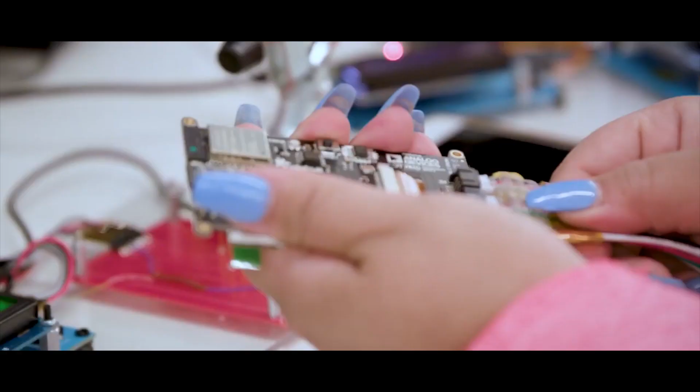It began when I started contributing in open source. I noticed that out of 40 contributors, we were only 2 women. And I thought that something needs to be done about increasing the women contributors. There is a lot of focus now on how do we get more people into the community, not putting up walls. There's a lot of projects and things you can do that even if you're not a coder, you can help contribute.

Open source is a great way to learn a new technology, and open source is a great way to build communities. We have this weekly show that we do called Show and Tell.

We got an email from a parent. He said, my daughter turned to me and said, are there any boy engineers or are they all girls? Just because we have such a wonderful community that's so inclusive and we have such a wide range of people showing off their projects, this girl was living in a world where she could see so many people of different backgrounds doing engineering.

In open source, there is no foundation as to who can contribute. This way we get a lot of perspectives on a single idea. When you give people open source, what they do with it, you can't even imagine it.

1,847 guides. This week, here's the 3 that we were able to capture quickly before we left. Short but sweet. A lot more coming next week, of course.

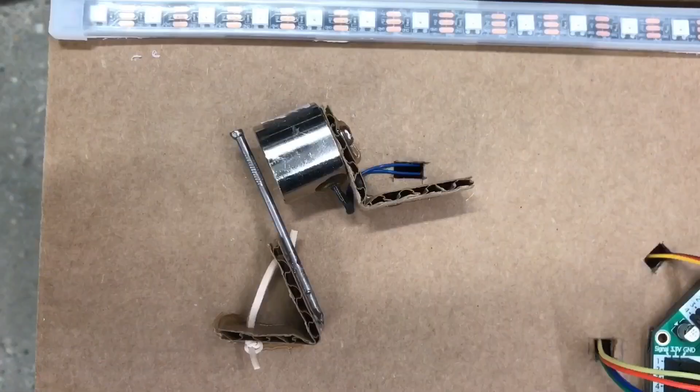And of course, we have a sunset. We will see the sunset tomorrow. For now, we're like you, watching from afar.

All right, 3D printing. We got two videos. One is a sped up to Curie engine, and the other one is the heat set. So we're going to play those. Take it away, Noah and Pedro.

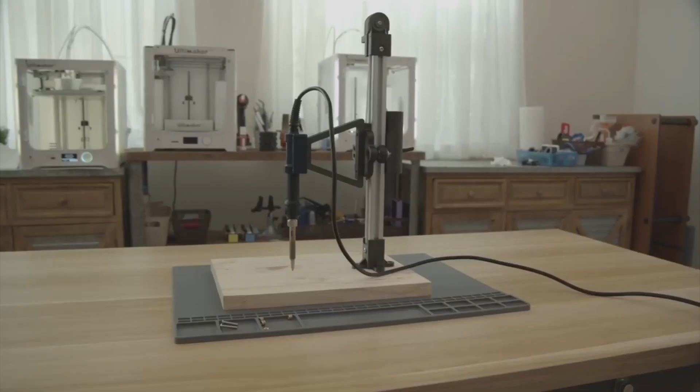Hey, what's up, folks? In this project, we're building a rig for installing heat set inserts.

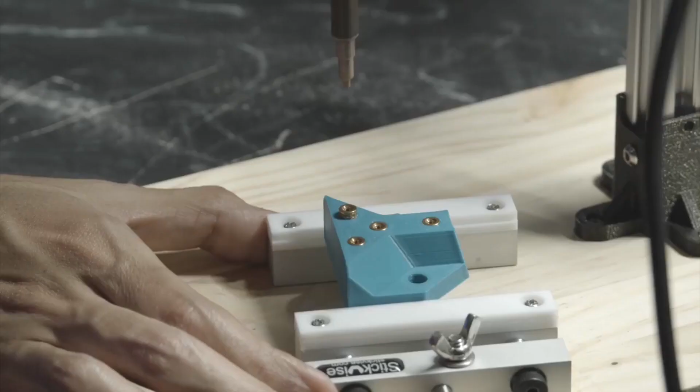So when you're working with 3D printed parts, a press can help you install heat set inserts. The tip of the iron heats up the brass and softens the plastic. Pressing down pushes the insert into the part, and as it cools down, it's pretty much locked in place. This could be pretty handy for folks that are doing a small production run, or if you're just looking for a tool to make this easier.

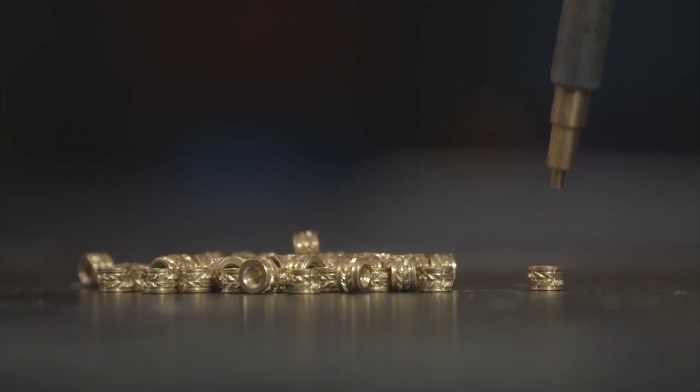The knurling on the outside of these brass inserts are designed for thermoplastics. This tip is specially designed for installing inserts, and it works a lot better than your regular soldering iron tip. These are compatible with irons that use the internal ceramic heaters, like the mini Hakkos and Wellers. This thing has a longer shank than the McMaster ones, so you can reach into deeper parts and tighter corners without touching the plastic.

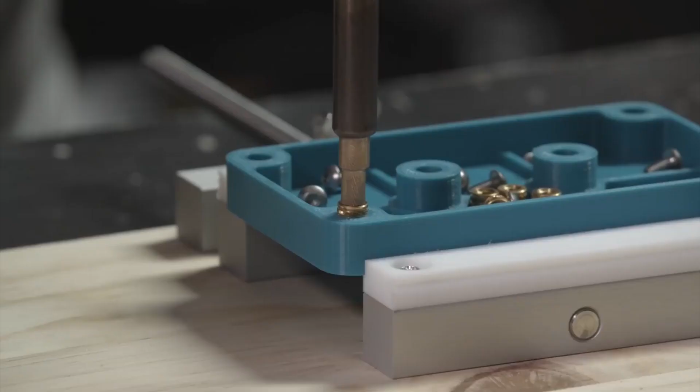This thing holds the soldering iron vertically and allows you to press down perfectly straight. This thing feels like pressing a hot knife through butter. The linear motion on this is pretty smooth, and it makes it oddly satisfying. Just look at these shots. This is definitely over-engineered, and we spent way too much time on it.

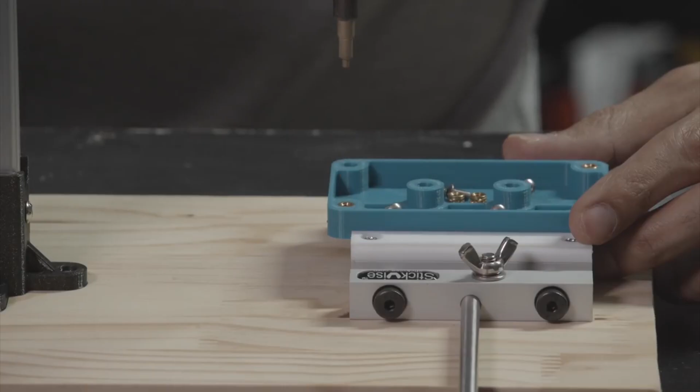But hey, you know what? I ruined way too many parts to keep doing this by hand. The rig is pretty modular, it uses common hardware. The 3D printed parts could be remixed and modified if you want to use other components. There's a learn guide for this project, so you can build your own. Links are in the description.

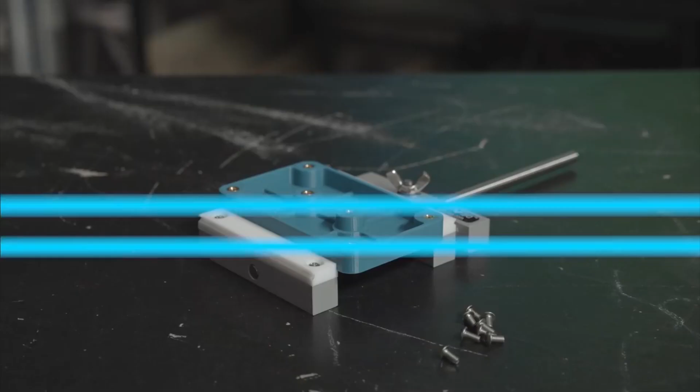Threaded inserts are pretty good for making bolted connections, especially when you're securing parts together. Adding metal threads to your parts adds more durability, because you can loosen the connection and take it apart without wearing out the threads.

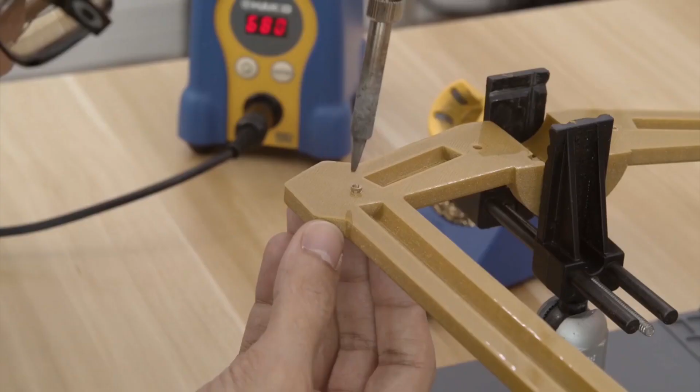Holding the iron straight seems simple enough and it works fine most of the time, but the shape of a regular soldering iron can actually pull it out while it's melting the plastic because it's tapered, and that can totally ruin your parts. So the bottom of the insert just barely fits over the mounting hole and rests on top. The insert needs to be lined up with the tip in order to go in straight.

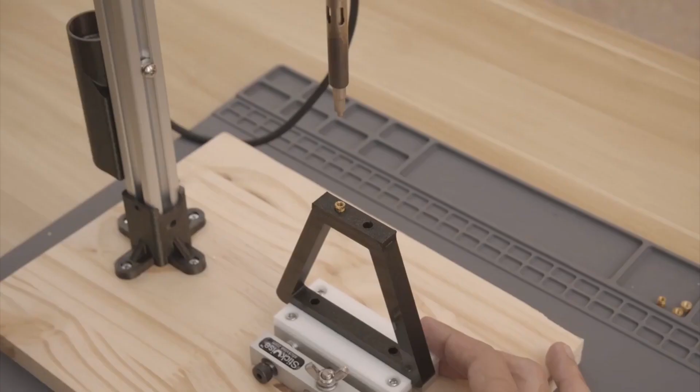I think using a vise to hold parts is way better than holding it by hand, as it could be a little shaky. The stick vise is nice because it's got a low profile and it's level with the platform. Works much better than helping hands or a PanaVise.

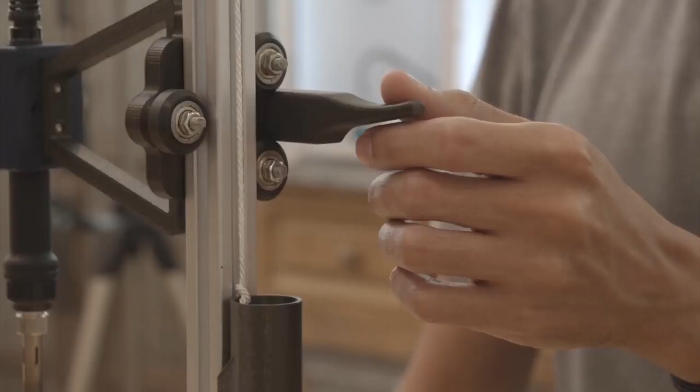The build uses a piece of 2020 aluminum extrusion and a roller carriage. It's got ball bearings and wheels that go up and down the piece of 2020. It's counterweighted, so it's effortless to press down and lift it back up. There's a pulley and idler at the top for a paracord to loop around the ball bearing.

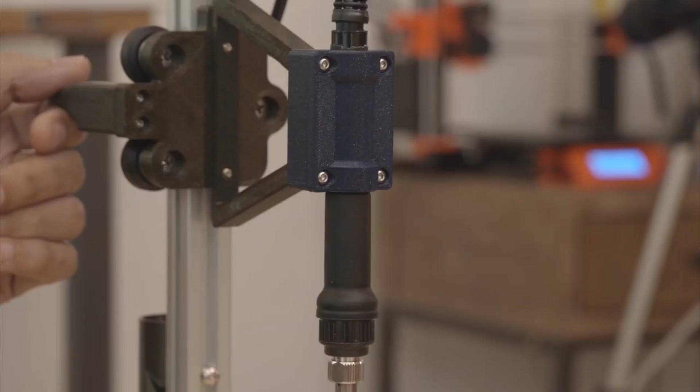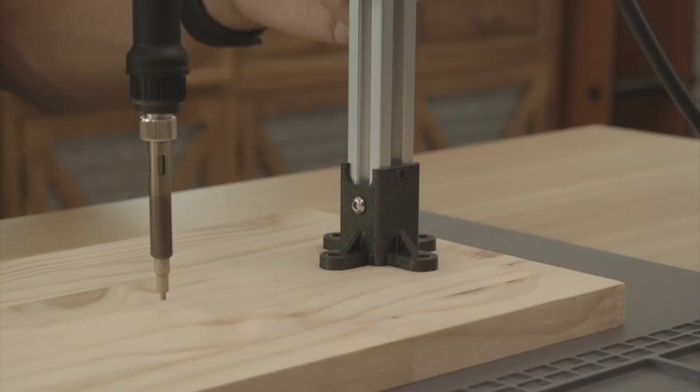The soldering iron is clamped to an arm and bolted to the roller carriage. There's a little T-nut that acts as an end stop or depth stop to prevent the tip of the iron from hitting the platform. The platform itself is just a piece of wood with the 2020 secured to a 3D printed bracket. This thing makes heat sets so much more precise, and it gives perfectly straight results most of the time.

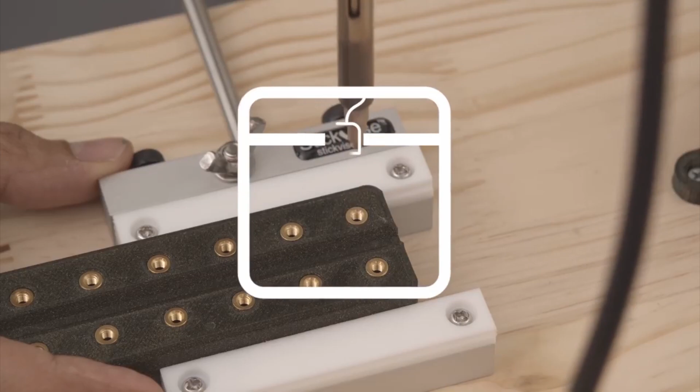The original design was a hacked plunge router attachment. Albeit it was simple and cute, the hardware made it difficult to use and it only worked with small parts.

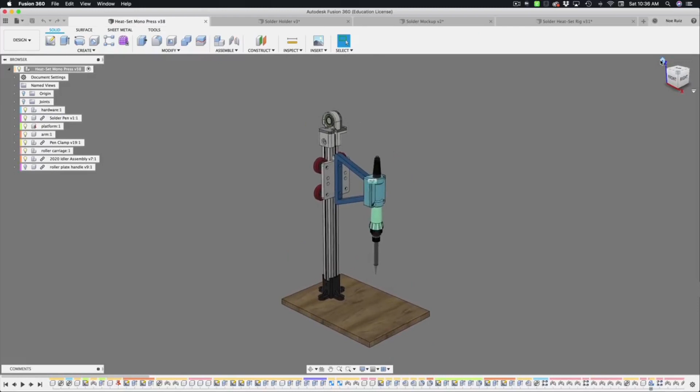Bill Binko put together a nice mock-up in Fusion 360. His design uses a roller carriage and a pulley to move the iron up and down the piece of 2020. I riffed on his idea and designed the parts to be a little bit more minimal, using less hardware, and it prints without any support material. Bill and I both went back and forth to come up with this.

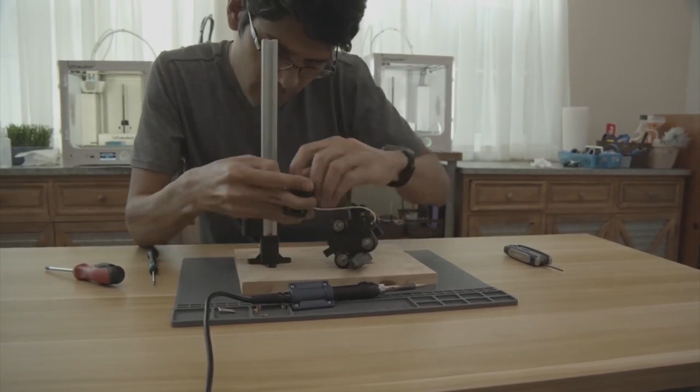So if you're making a lot of parts and need to streamline your production, a press rig might be the tool that you didn't know you needed.

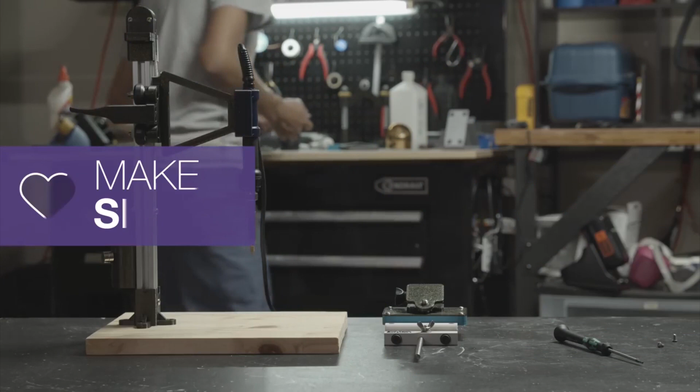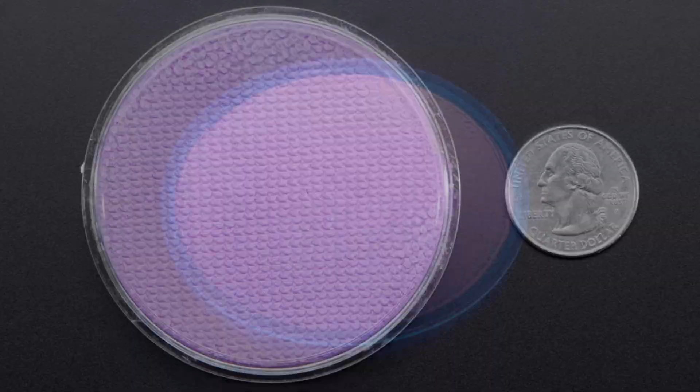We put in the thermochromic inks and powders, and now we have this pressed powder that's UV reactive. This is a pink color. It comes in a little plastic tin, and we have one drawing. It's the same drawing, but you can see all the different colors. Under UV, it glows this beautiful bright color. You also have purple, same photo, you can see the purple. And green, which is really vivid.

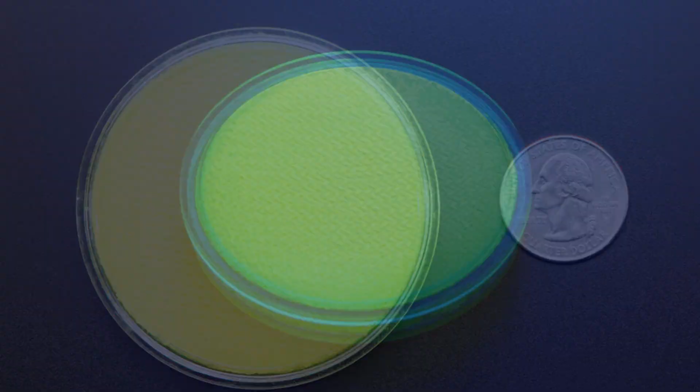And that's the Adafruit star. And yellow, which is also very vivid. The yellows and greens are very vivid, but the pinks and purples are too. There are more colors available, but these will look the best. So we started with these, and we only wanted to carry ones that we thought would look really good under UV LED or blacklight.

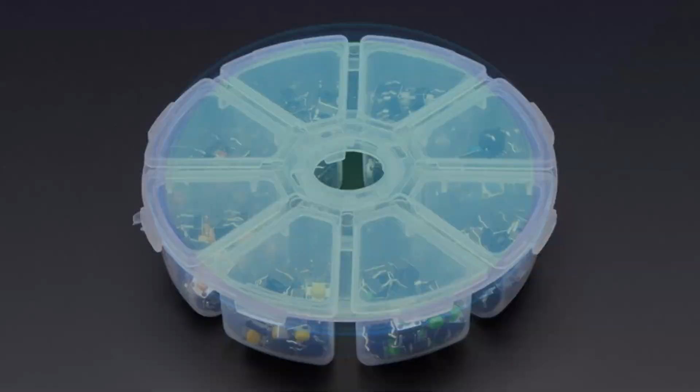So you can mix this with almost any material you like, whether it be water or wax or plastic, and make something that glows under blacklight. All right, next up, we also have what Phil B calls the deluxe party tray buttons.

So the place I get my silicone buttons from also had this available, and I was like, this is the coolest thing ever. Wish I had it to show to you, but it basically is an 8 segmented case, and you get the case, and each one of them has about 20 LEDs and 20 6mm tactile buttons, and each button has a different color top.

So you get red, orange, yellow, green, blue, brown, white, and black. You get a wide range of colors, and they're all the same 6mm tactile buttons that you're used to using in a breadboard, but you get this deluxe party tray. You can take this on the go and snack on them, whatever you like. No, don't snack on them. But yeah, you can see each little thing opens up individually.

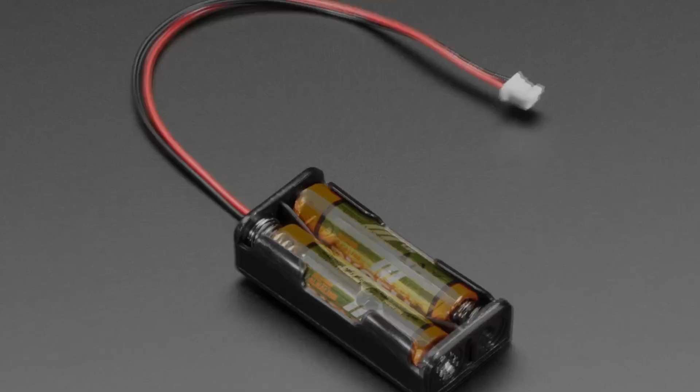All right, next up we have 2 more battery packs. These are open style battery packs, so they're lighter and easier to remove the batteries, but they also don't have on-off switches. We have them as a 2 AAA, and also a matching 2 AA one. These give you about 2.7 to 3.2 volts from alkalines, and 2.2 to 2.8 volts with nickel metal hydrides. These are really good for use with microbit, if we wanted an alternative battery pack for use with microbit, but it could be used for other projects where you only need about 2 to 3 volts to power them.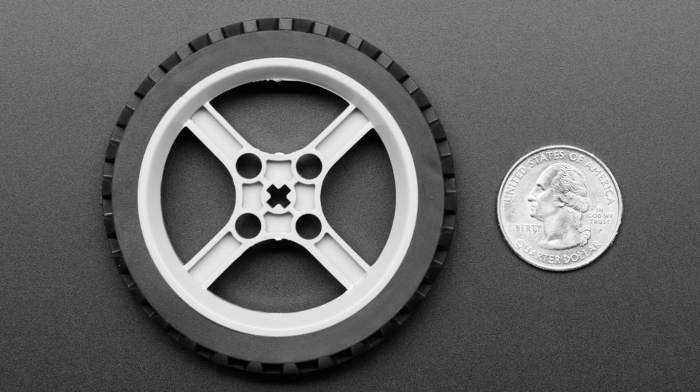These wheels, Michael, it's this is a really nice wheel. This is a rubber wheel for robotics, and we carry a couple different wheels, but I like this one in particular because it can be used 3 ways. When you get the wheel, it has these 2 little plastic pieces that you can pop out, or they might come loose. And they can convert, by default, it has a cross, and that cross is Lego compatible. So if you've ever done Lego robotics, you know that the axles have this cross shape. So that will fit onto the wheel. So you can use this for any of your Lego robot projects. It's a nice rubber wheel with treads on it. I think it's about 65 millimeters in diameter.

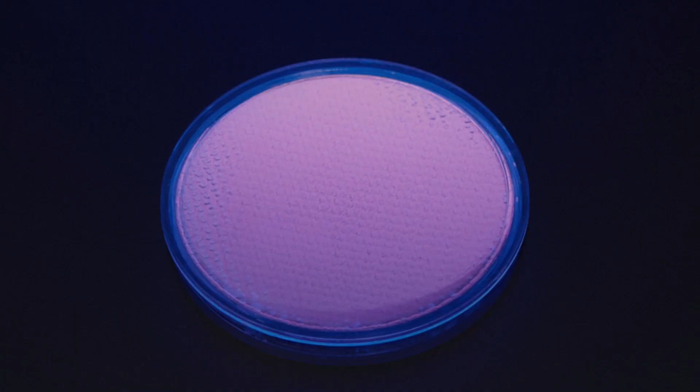We have these fluorescent powders that you can mix with water or oil or wax or whatever to make fluorescent items. We get them in pink, we have it in purple, we have it in this really bright green, and we have it in this glorious lemon yellow, which is kind of this classic UV reactive color. And these work great with UV lights or black lights. Yeah, you mix them with whatever you want. You can paint it or integrate it into your project to make it UV reactive.

Party tray, deluxe party tray. I have LEDs coming in. Have some, they're delicious. You can get 8 different colors of 6mm tactile buttons in this lovely little tray. You can open up each individual component.

You get 20 of each color: red, orange, yellow, green, blue, brown, white, black. Very handy if you want to decorate your project with more colors.

We have 2 AA battery, 2 dual alkaline battery holders with JST connectors on the end. These are great for use with micro:bit or other projects that have a JST input. These are the open style. Last week we had the closed style with the on-off switches. These are a little lighter and smaller, so if you need to tuck this into something that takes up less space, use these if you need something with 2 to 3 volts power.